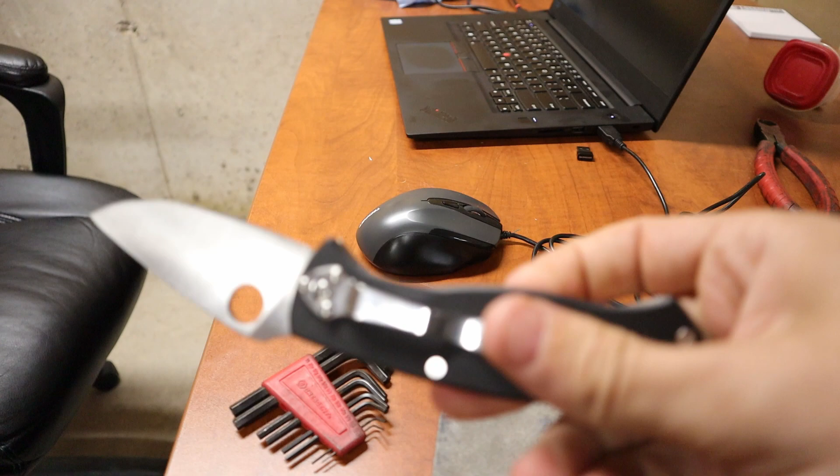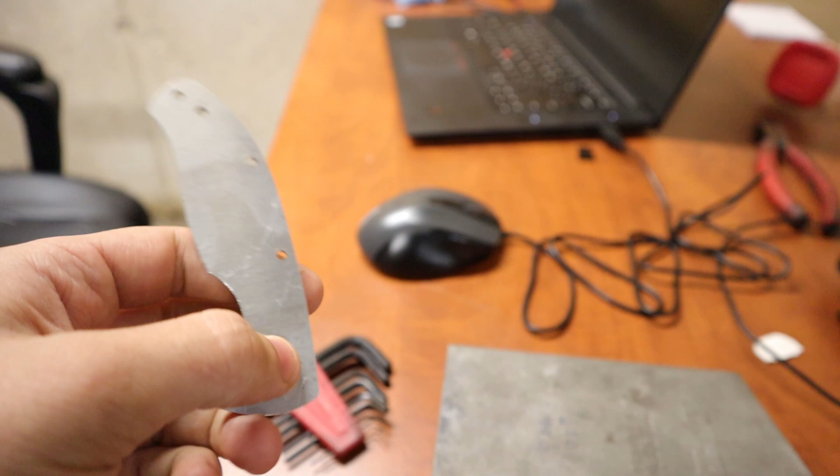We're going to talk about handles for this Spyderco Tenacious that I got. So this was the handle that we worked on last time, and this pin, the rotating pin or whatever, slider pin, was too big, and so this is the one that's currently on here with the company logo. So this is basically version 4 that I have, and there's a couple things I had to change.

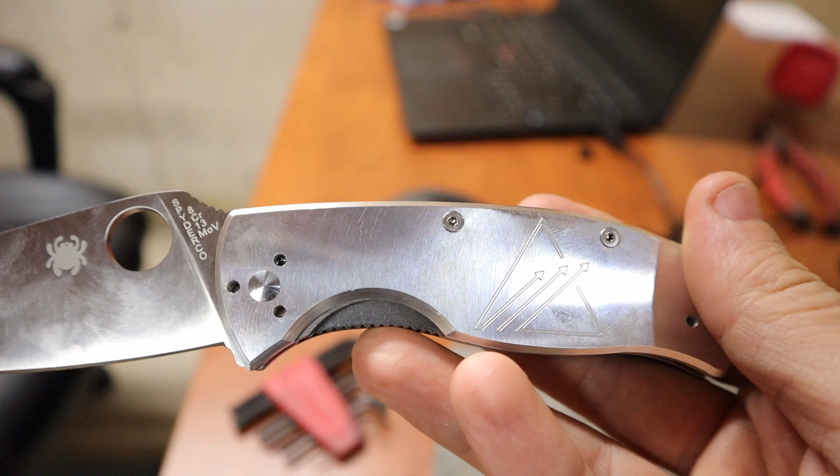I don't know if the camera's going to be able to pick it up, but you can see the top middle body is, yeah, you can see it there, is bigger than where the handle comes out, so I adjusted that. And then other than that, it's pretty good. For some reason the stock was incorrect when it machined it, so it actually machined on the edge of the stock. And in Fusion, the body was centered, the model was centered, so it's kind of weird that it did that.

But other than that, it's good, working. There's enough slop in the pin. Well, I wouldn't call it slop. There's just enough to have the action really nice and smooth, like on the knife. So yeah, I like it.

So we're gonna do a bottom one, possibly today. I'm not too sure. I'm on the fence about if I should remake this and this one today, or if I should actually do some organizing in here. But this is kind of not a guide style video, but more of a vlog style, so I guess we could choose whatever we want to do.

But some updates as far as actual machining things go. I got more pull studs in from Maritool because I only had 15 before, so these are through coolant pull studs. And I think if you're going to buy pull studs, you might as well just buy through coolant, unless you never ever plan on needing through coolant, because the through coolant ones are only a little bit more expensive. Yeah, so there's that.

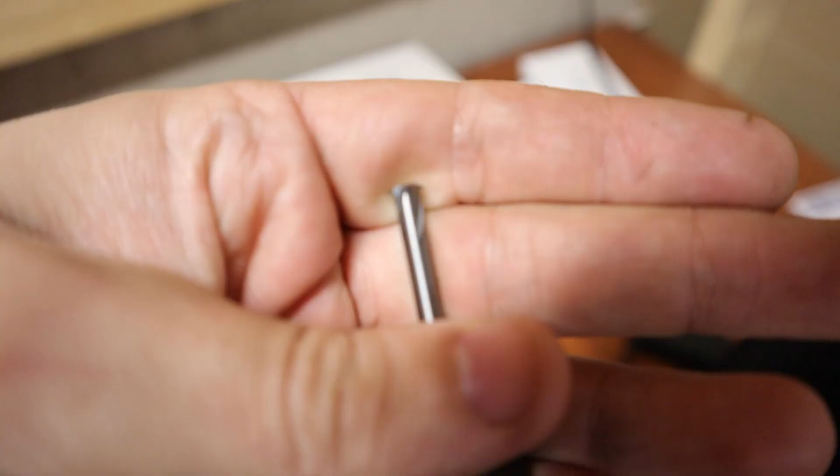There's some tools that I got from Lakeshore that need to be organized. Like here's a thread mill, which I have absolutely no idea how to use, but there are guides on the internet, so we'll be okay. Check it out. Yeah, single point or whatever you call it, four edge. I don't know how you actually define this. Yeah, they call it a 4-flute. So 4-flute. There's that, and then there's a couple of really nice cutters I got.

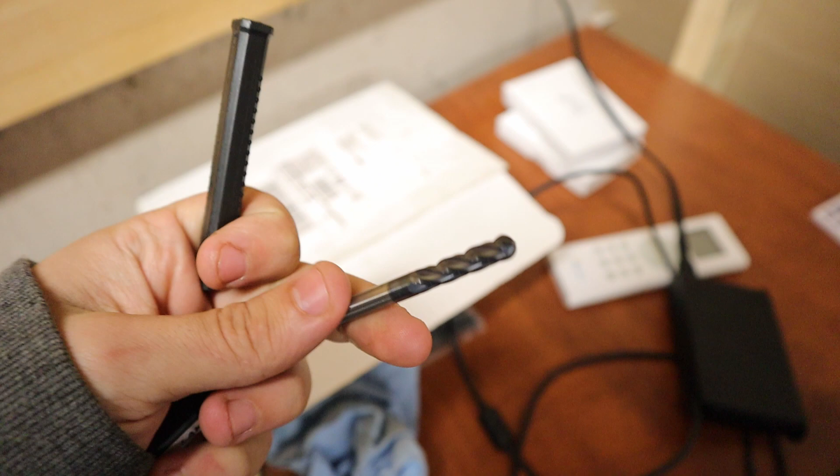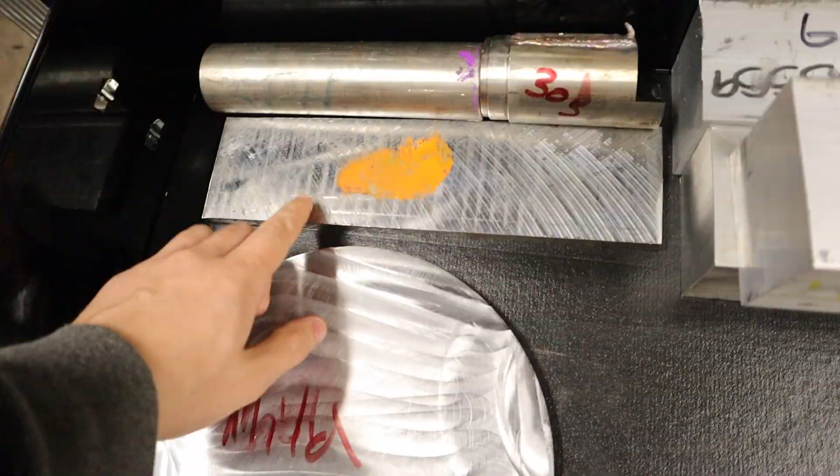Really nice tools. I thought I wasn't going to have much use for them, but I'm working on one of those mini pry bars. And that's going to be made out of tool steel, which I have. I'm not entirely sure what kind of tool steel, but she's tool steel. So we're going to do a pry bar out of that. I'll show a video later. We'll do a video. It's only like that big.

It's about the entire length. Actually, it's probably a little more. It's probably this body plus half. So probably to here, where my thumb is. Not that big, and much more narrow too. But yeah, I want to build a pry bar where the end of it's like a pry, and then the side part has an actual blade on it, so it's like a dual purpose type thing.

And if anyone is curious, this is kind of how I organize the end mills. So I just have them listed, like this says 1/8 4-flute, square end, high speed steel, and then if it's got a coating, it'll be on the end, and then the actual material, solid carbide, square end kind of thing. So obviously it's still a work in progress because some of them are not filled, and I don't have all the labels for what I got from here.

Let's see. Let's go ahead and set up. We'll set up one piece of stock to do 2 of these. And hold on, we'll do the startup on here.

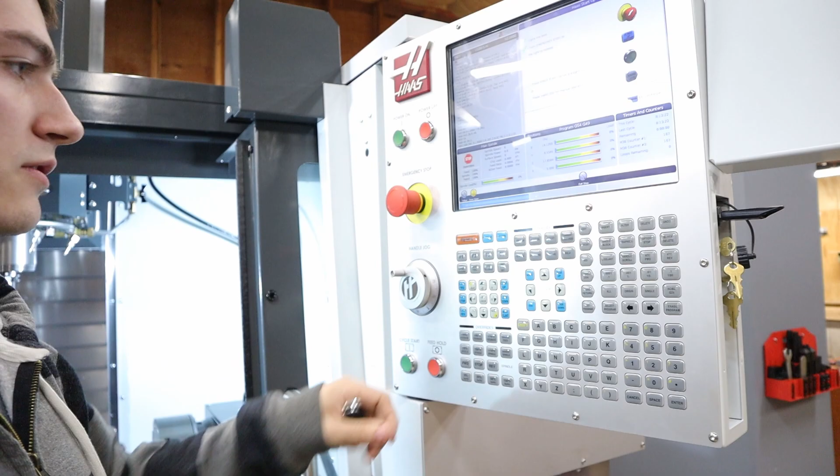I already warmed it up today, but I haven't been in the garage for a couple hours, so I usually just shut it off. That way, save some power.

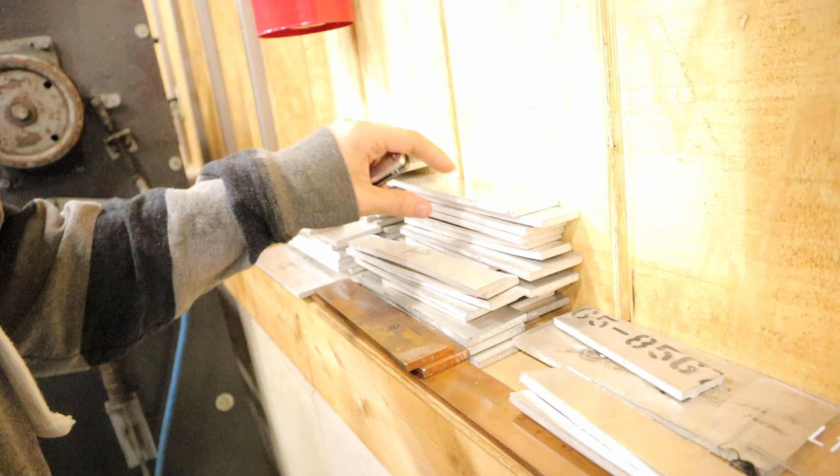So let's get some stock for 2 handles, which is, we got a ton over here. So all I'm gonna need is one that's long enough to do both. That might work pretty good. Should be able to fit 2 there. Yeah, I'm just trying to figure out, I guess. Yeah, maybe we'll use this piece because otherwise I'm not gonna have any use for it. Let's load it up in the machine like that.

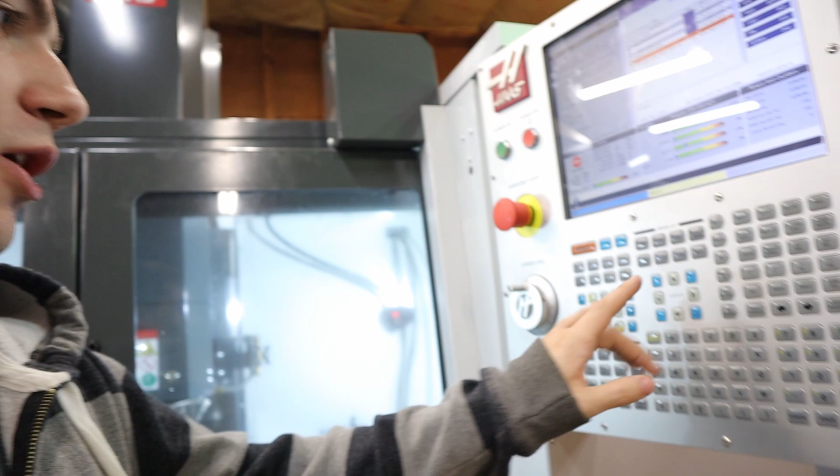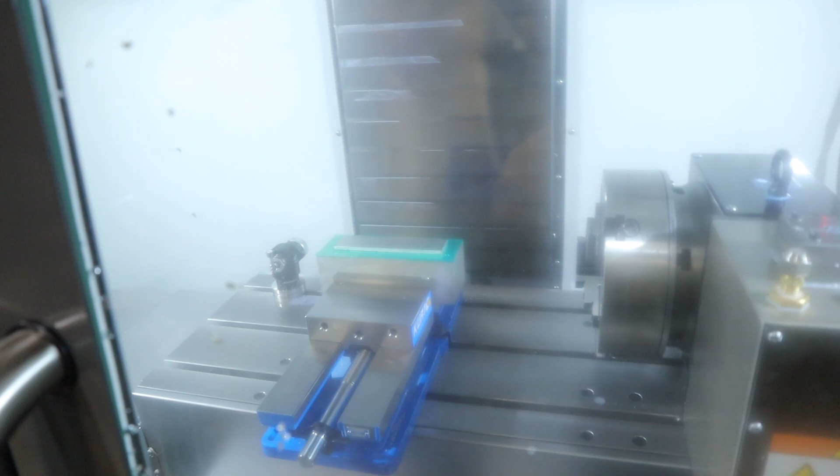Did the offsets, did the center offset and the up and down, the Z. And we're gonna hit go. Oh, make sure, if you're like me and you can't afford high-speed machining, make sure it's turned on. And then I'm just gonna let it go and see if it doesn't shut off during the actual program because of voltage drop issues. Well, good times. Yeah, that's what happens when you don't have enough power in your garage.

Yeah. All right, things are going semi-smoothly. Currently doing the bores for the slider pins and the whatchamacallit, the screws, the shoulder screws. And I changed the step down. So this is a 16th inch tool, so it's pretty tiny. So I changed the step down to, well, I don't know what it was, but just so it has some step down as opposed to basically helixing down at the bottom of the hole and then taking a huge full depth cut. Well, huge in the 16th realm.

So it sounds much better because instead of doing helix all the way down, doing a full cut, it only does like a quarter of that. So before it was squealing, and now it sounds like a much more normal cutting sound, if you will. I don't really know how else to describe it. So this next is the exciting part where it does the 2D adaptive and actually hogs out most of the material. Yeah, so going good.

And then after we do this blade, we'll do the bottom blade, and then we'll see about maybe making some fixtures to actually do these production style, and updating some designs for the engraving part, make it kind of cool. And then maybe try different materials like TI or copper or bronze or something pretty cool. So yeah, I'll update you in a second.

All right, I'm back. I just went and ate some Chinese food mid-production. I'm such a terrible person.

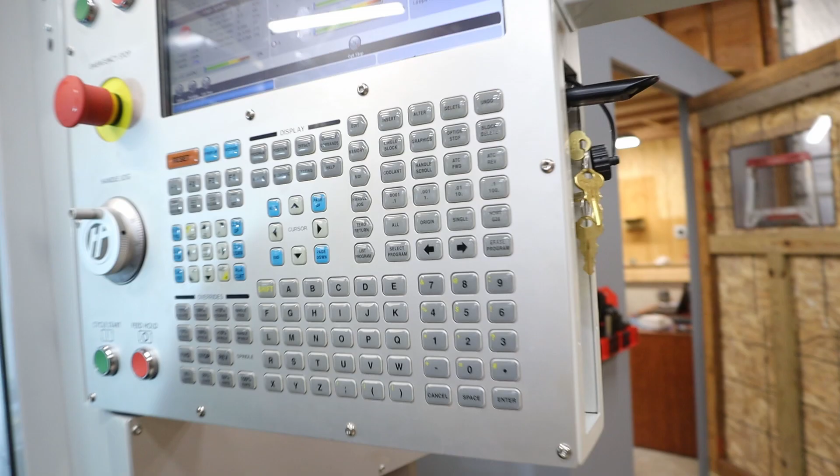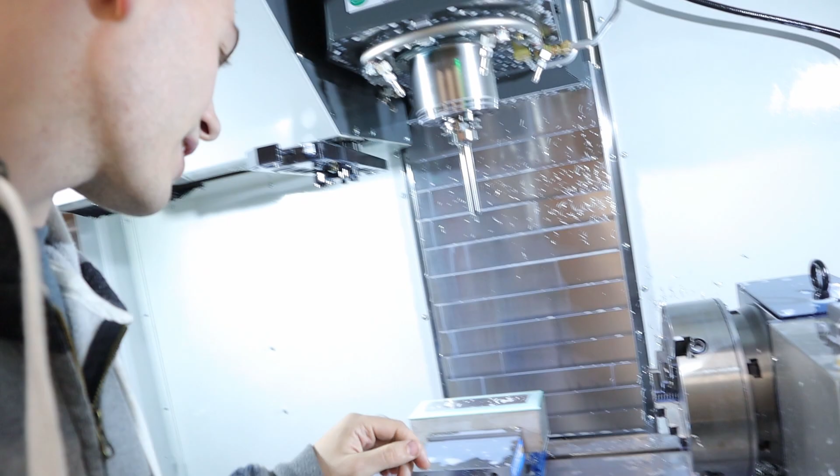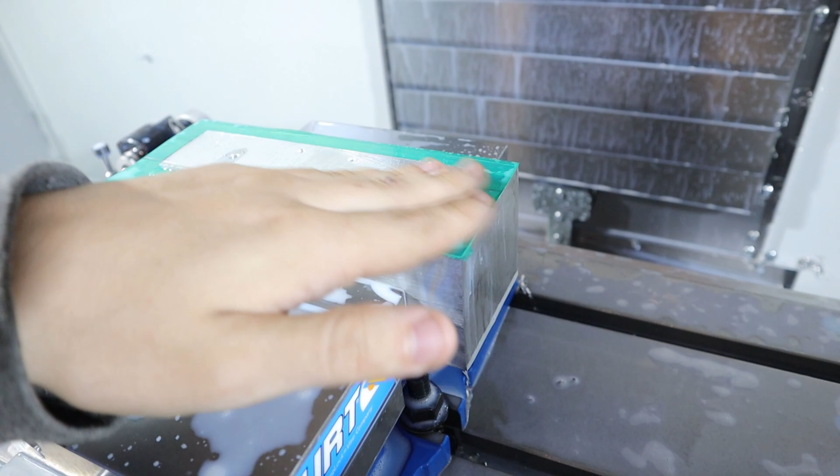Pro tip, if you didn't know, there's this button that says option stop right here on the Haas machine that'll actually option stop the program between, I don't know what M code or what actual call it makes to determine the option stop. But the nice thing is when the machine stops in between the tool paths, you're allowed to open the doors and stuff, at least on this VF2. So we're in between ops. The next one is to hog out the actual profile of the blade, and we're just going to take a look at the finish we got right now, which is pretty good.

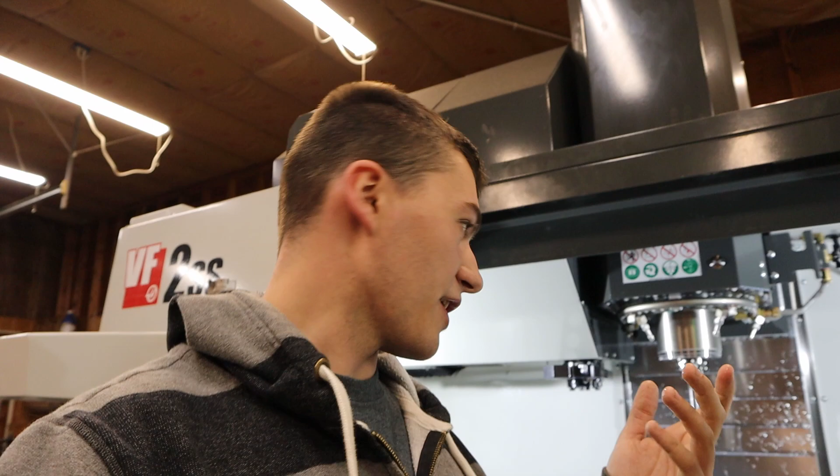There's still some shell mill tool marks, and I think the inserts that are in there are general purpose. Excuse me, ate too fast. The inserts that are in there are general purpose, so that means that they are purpose to cut everything. There's a feeds and speed listing for every single material. So they're not finishing inserts. If they were finishing inserts, maybe you'd have a better finish than what's shown.

And I'm also still working on the feeds and speeds. So I did a finishing pass on this one of like 15 inches per minute, or maybe it was 15 feet per minute. I don't remember. Inches per minute, I think, and 5,000 RPM. So with a step down of 30 thou maybe. So you can kind of see the finish. Actually, the faster feed before, 30, I think 35 inches per minute, actually left a better finish. So that's something interesting. Might have something to do with the peeling action of actually cutting.

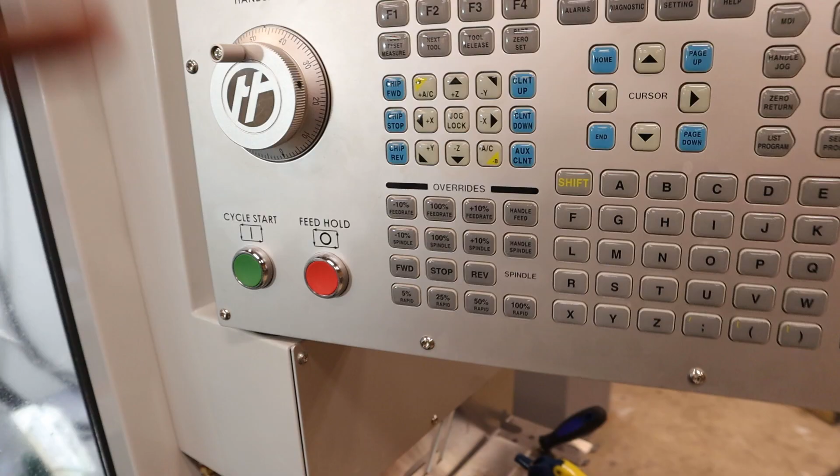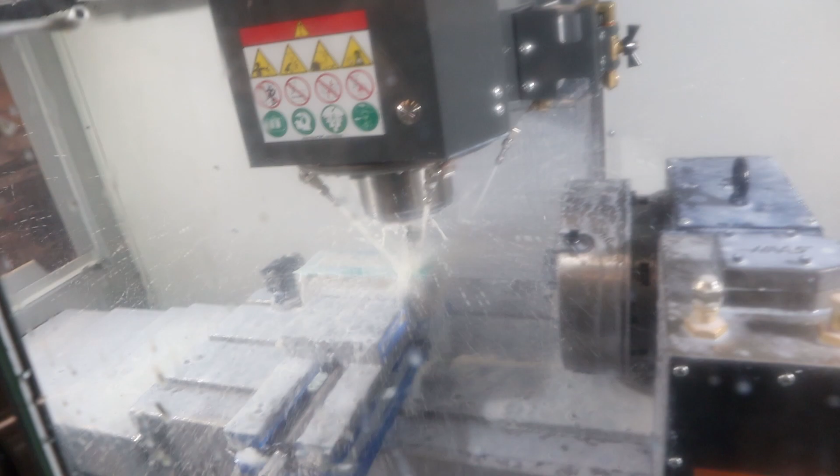And I think it sounds pretty good. I bet you could go a lot harder, but one, we're glued down. These blocks aren't necessarily flat on the bottom, so I don't want to have them fly off and hit the tool setter or anything, because that would be expensive and make me a sad boy.

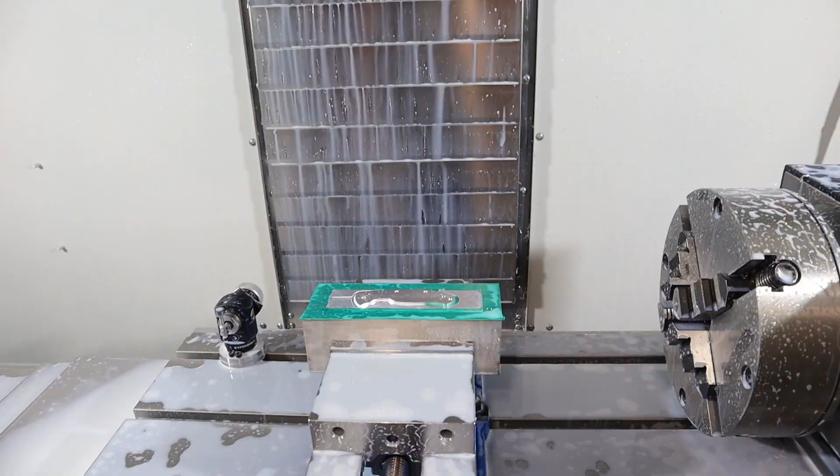Alright, we got the handle profiled out. I think this looks so cool, how nice that side finish on there is. Let's see. So it's just a normal 2D adaptive, and then a 2D contour to clean up the edge. So that looks pretty good.

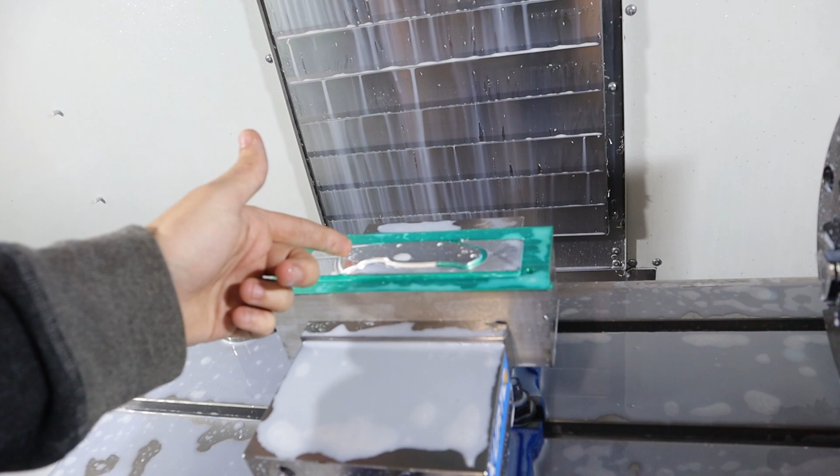Next is a 3/16 ball end, and that's going to do a scallop tool path, and that'll do the edges. It'll cut the edges over, roll them over, make them nice and clean. And then after that, we're going to engrave right down in this corner here. I don't know if you guys can see that. Coolant dripping all over me. Right here in this corner, we're going to engrave the company logo.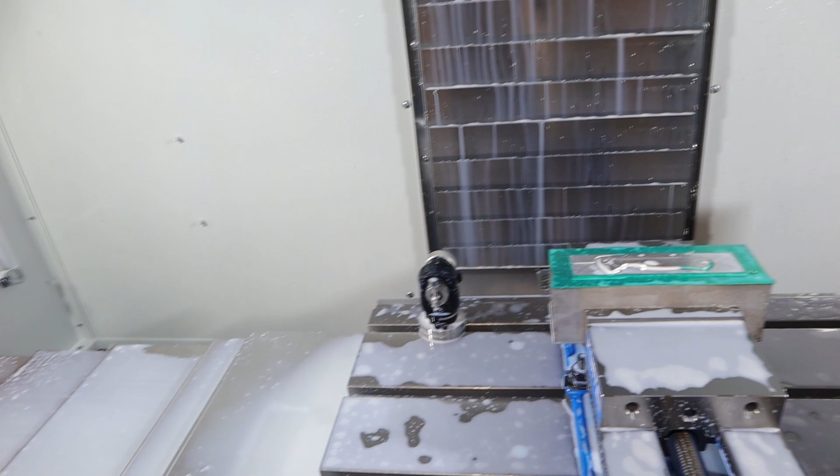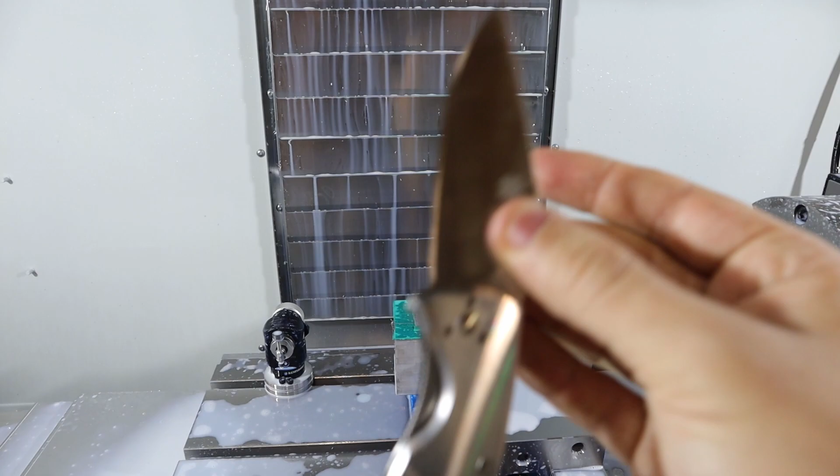If you see the handle, I know I showed it at the beginning of the video, but this one that's on there, that's what the logo looks like. So it's super simple, but there is a space between each arrow, so it might be kind of difficult for the tool to get in there, because the tool that I'm using is a Lakeshore Carbide 20 thou ball engraver.

But you'll see it in a second after we do this surfacing. So yeah, I don't know if it'll work in there. The tool path shows it will, so we'll just have to find out. It'd be cool to have a small discreet logo. I think that always looks cool. I'm not too much of a fan of doing the big logo like that.

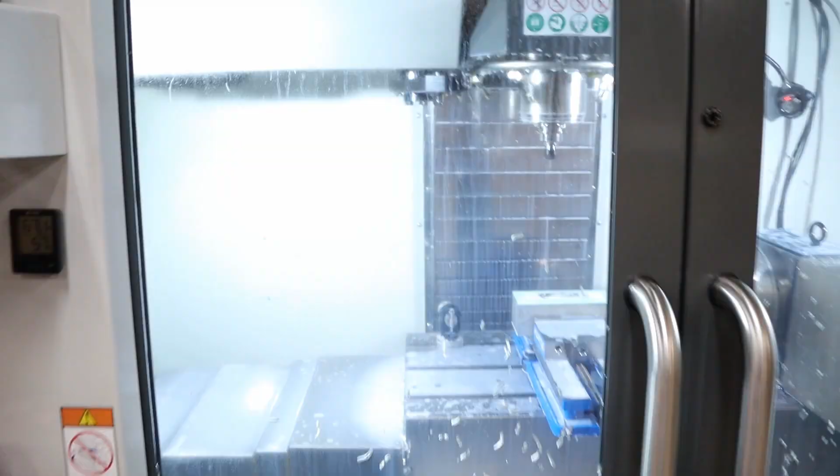Cool. Now we're gonna do 100% spindle. Apparently we're not. Alright, give me a second, we'll restart this thing. Oh boy, it's still spinning. Yeah, it doesn't actually brake when it shuts down like that. You gotta wonder how bad that is, to have the spindle still spinning while the machine's off. Like if it backfeeds somehow. I don't think it would.

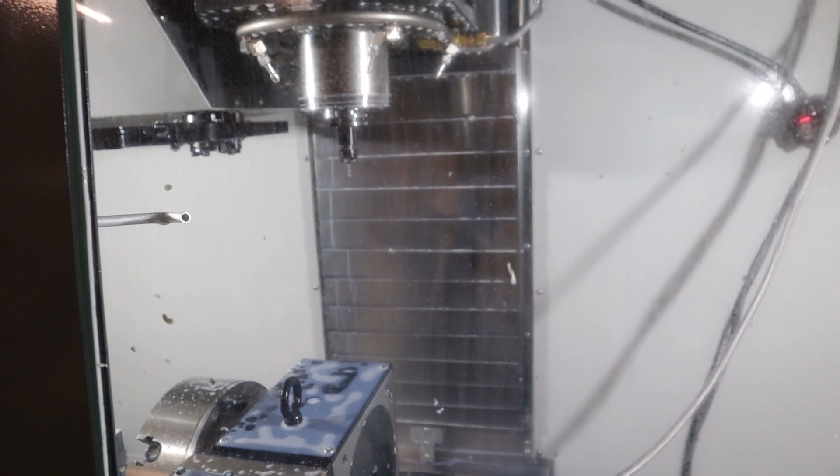I can't imagine a low voltage issue is that awful for the machine as opposed to a high voltage issue. So yeah, the worst part is you could use the spindle brake if it did a tool change, but you can't do a tool change until you go through the startup steps, and you can't cycle the door because if the spindle's turning, the doors are locked. So just wait for that to spin down. That just means my bearings are really good, what can I say? You know what I'm going to do? I'm going to re-aim those jets because none of them are hitting.

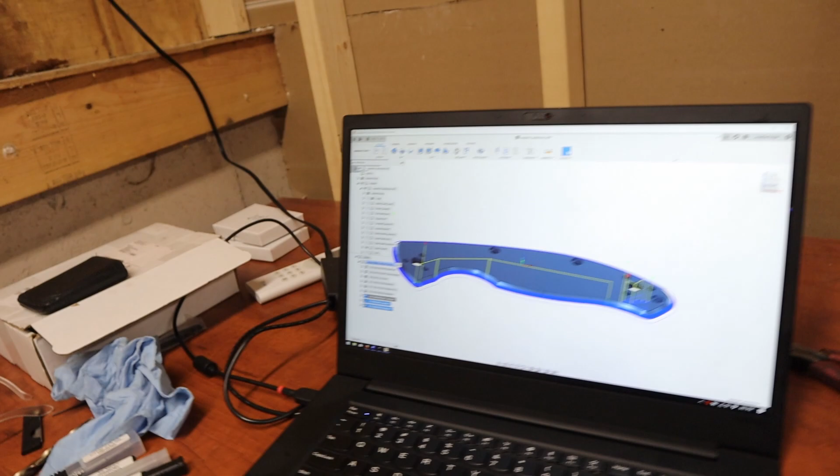Huh. You know what I must have done is posted out just the contour by accident. Let's see what I actually did. Oh yeah, see? Okay. Alright, give me a second. Pretty funny because I had that heart racing moment when I was like, why is the tool going off to the side? I could have sworn the ball end mill goes down center. But obviously I couldn't see that it wasn't a ball end mill. Yep, that's a ball end mill. All 12K.

I would say this is probably a good speed for this setup, from what I can tell, finish-wise and productivity-wise, if you will. Oh, that glass is way dirtier. I love the air blast on here. It doesn't do anything. I guess it depends on your coolant, but this coolant seems to run down pretty good. The coolant we use at work sticks to the glass really bad, and with this, if you wait a while, the glass becomes pretty clean. Like I was saying in the other video, I need to get a GoPro and stick you guys in there. It's always a good time.

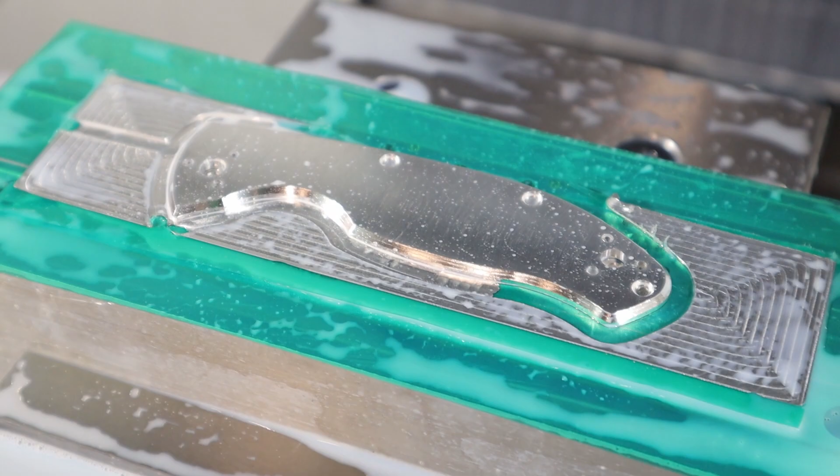Alright, sweet. So we got the profiling done. It smells like food in here. I hear this is terrible for your lungs. Oh man. That is clean. Look at that. That's awesome. Looks better in person, I swear.

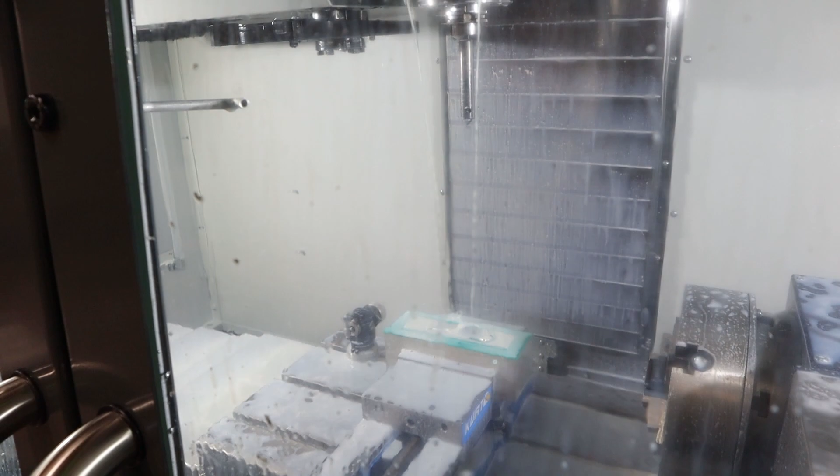Alright, next is the engraving, and like I said, we're going to do an engraving right on this back corner here. And I'm excited to see how it turns out. And hope it crashes through. Excellent. Wow. I think it was too tiny to even run the toolpath, because I don't think it cut anything. Oh, look, it added some nice dots. I don't even know if you're going to be able to see them on camera.

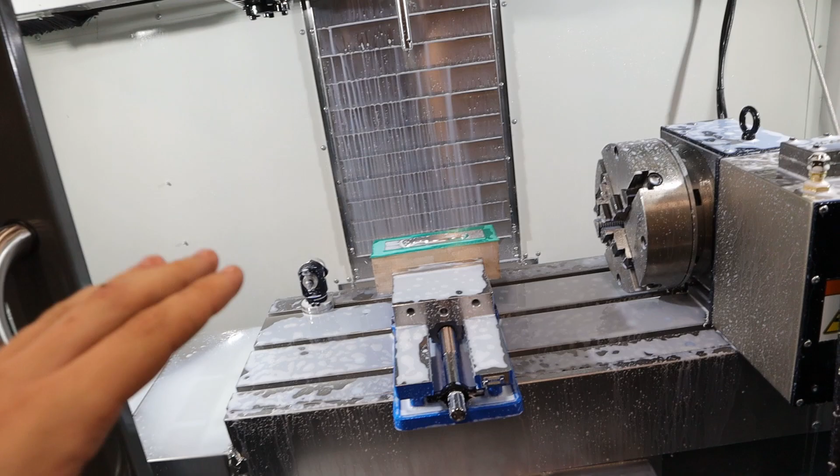Unhelpful, truly. Oh well, I'll just pull that handle off, and then I don't necessarily need to have it engraved anyways. The company logo is not that exciting. Alright, I'm going to pull this off, and then we'll get started for the bottom side handle.

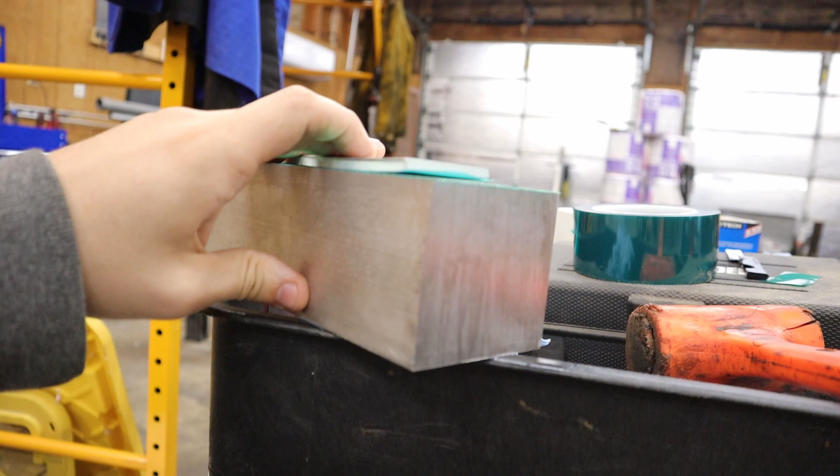If you guys are curious how I'm setting these quick prototype jobs up, I got masking tape, well, actually it's powder coating tape, and then powder coating tape, and then this 2P10 super glue. You put the super glue on this guy and place it down on here. Make sure you're mostly straight. I tend to not worry about it being straight. I mean, mostly straight, but man, this one's kind of bowed slightly.

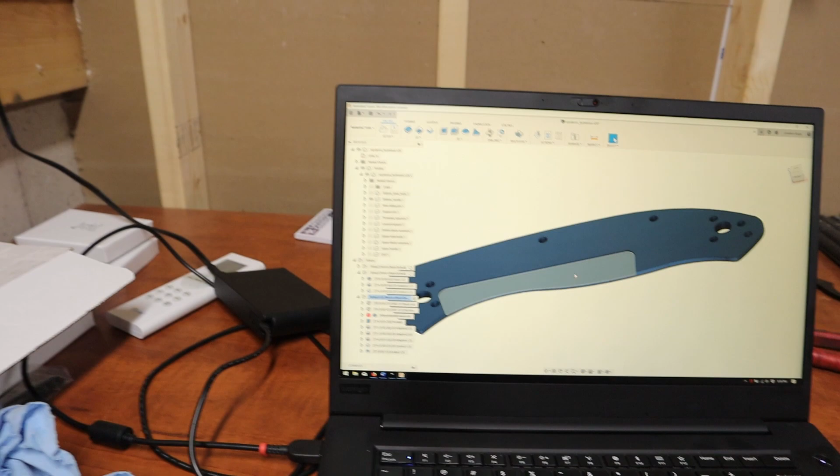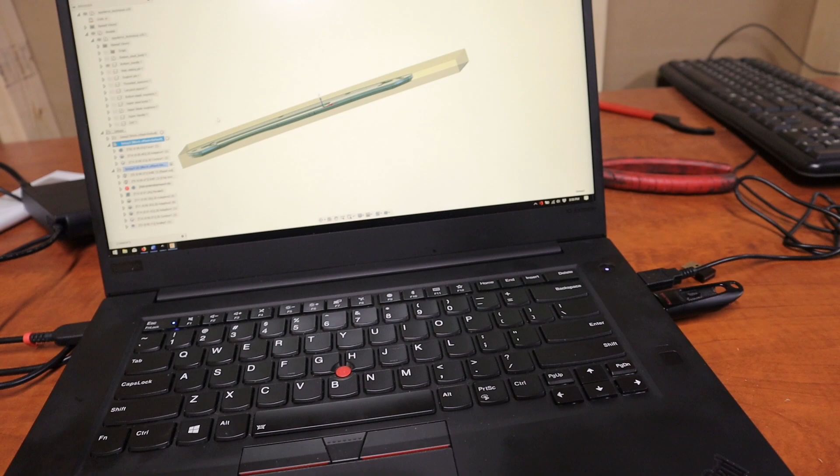That'd be okay. Alright, ladies and gents, I've been working on the CAM for this, and I think we got it covered. So the bottom handle has a relief right here for the thing, you know, the thingamabobber, right? First we're gonna face, start with our stock, center, face, do a 2D adaptive to clean that out, then a contour to come clean up the edge.

Alright, we got her all probed in, and hopefully it doesn't fly off the block, because she's got quite the bit of a bow to her. So we'll see. Well, that is not what I wanted there, Haas. We're gonna do position on this, just because I cannot see. Oh yes, it's not even touching it. Alright, I think I figured it out.

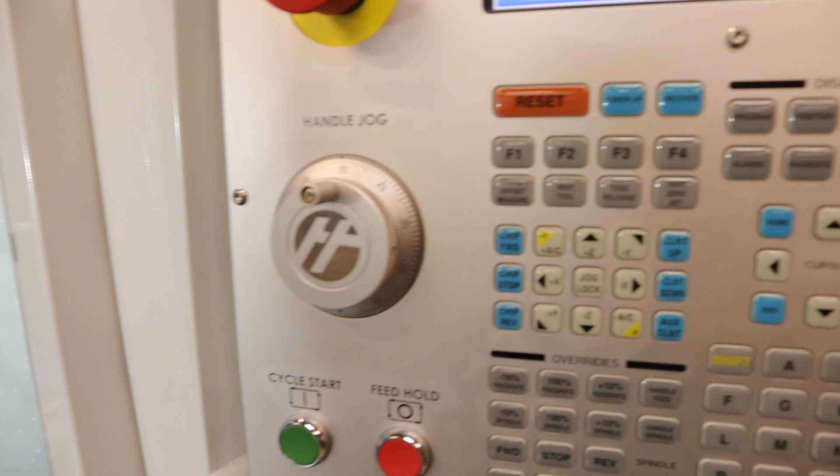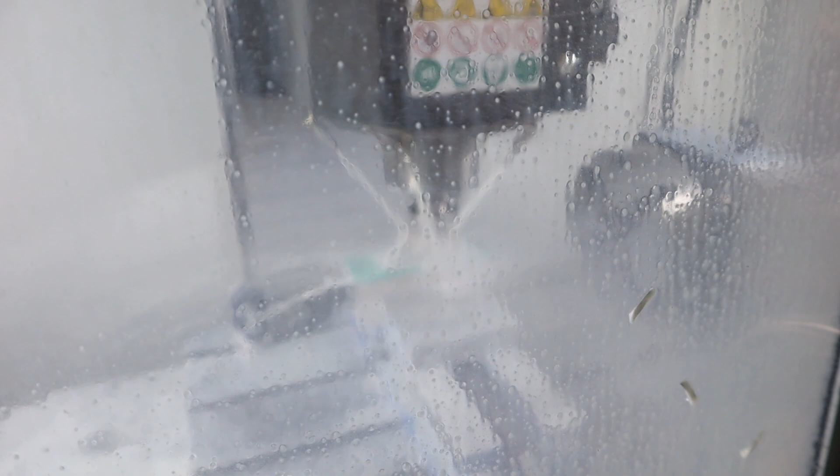I had the stock point, or the box point, in Fusion set to the top of the model as opposed to the top of the stock, so I'm almost certain that's what it was. I'm gonna hope that's what it was. Good luck! Oh yeah, let's mill with the probe.

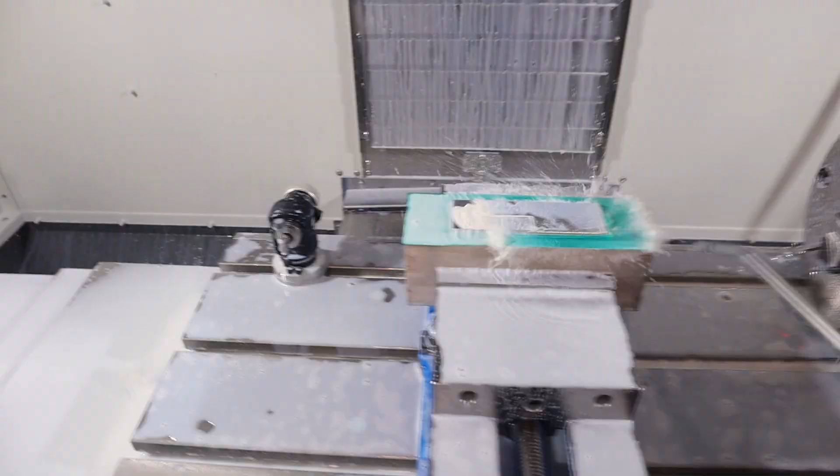Either that's the world's smallest relief, or the tool's not hitting the right thing. Oh, what a relief! I must have gotten the heights wrong on the adaptive. Alright, let me fix that.

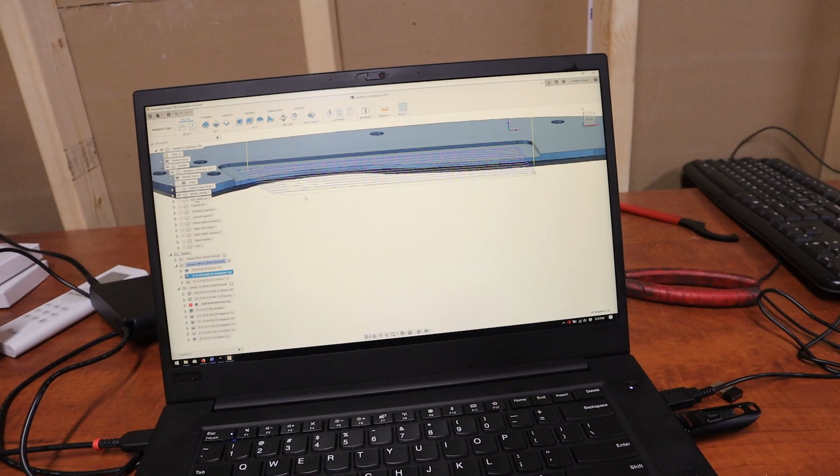Alright, it actually did that because I had axial stock to leave on the adaptive, and axial is like height-wise when you leave stock, and radial is like on the sides. And so this pocket's only 20 thou deep, and the adaptive was going to leave 20 thou axial, so that's why it didn't even cut on the floor, and that's why the contour cut, because the contour is going in at tolerance and cutting.

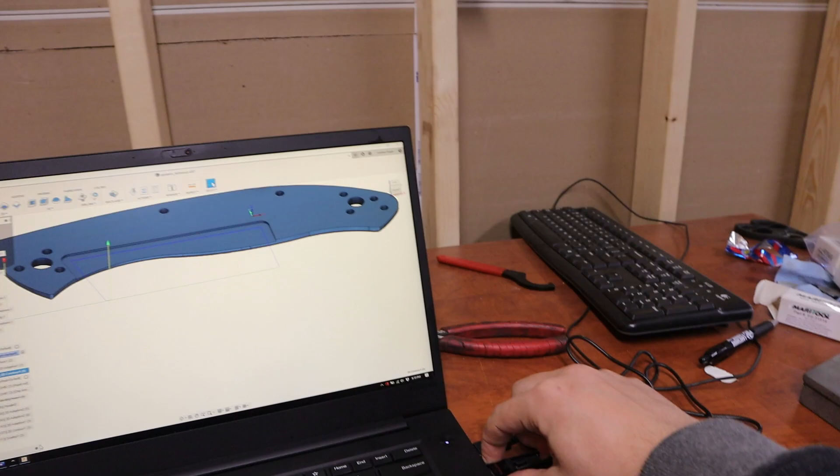So let's re-post process this. Actually, I just did that. And let's try it again. Machining is fun. There we go. Now here's the contour, which we already did, so it probably won't make a noise. Cool. So here's the bottom side. That's what that relief looks like.

Pretty cool. Alright, now what I have to do is unglue it, flip it over, luckily it's nice and flat now. And then we'll do the second op. I'm almost certain this is not the best way to do this, but when you don't know what you're doing, you don't know what you're doing, you know? So we can't put glue here because there's obviously a void of 20 thou. So let's just hope this holds. People in the comments laughing at me.

Cool, okay, so I measured the height now, which is 1.545 at its tallest. I updated in Fusion, so we're gonna go ahead and get this started. I'm gonna go ahead and get the probe. We'll measure the Z again because now the height's different, and do the offsets in the rectangular form because we don't have a vise stop or anything. So yeah.

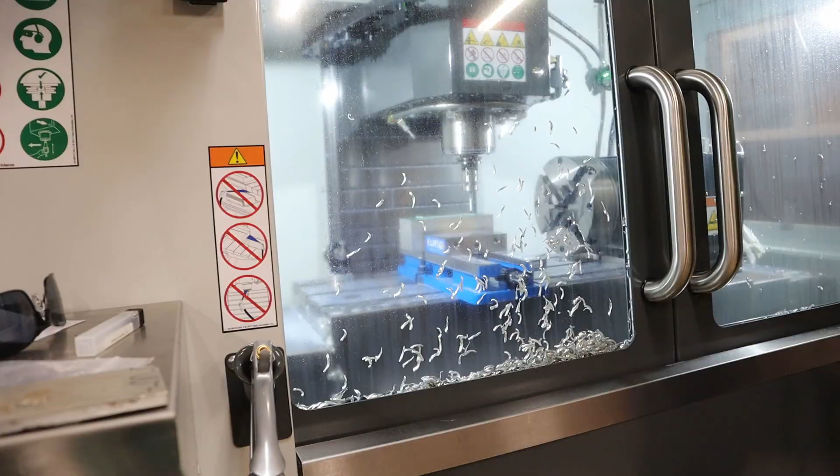Man, look how much you guys can see. I don't think the flood coolant is actually hitting the drill tip. Just like a cone around it. Alright, here comes the cool one. I'd like that tool path to start on the outside because I didn't like that dive into the top of the material, but it's all okay. It might be because there's that bow in the piece of material there. Hopefully this tool path looks pretty cool. Oh, that's kind of cool.

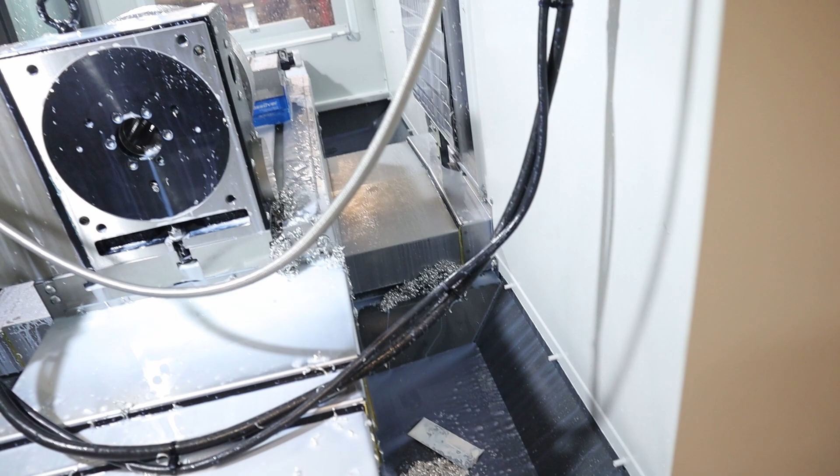Sweet. Didn't break, that's good. Now we're going to do the 2D adaptive for the outside. And I won't bore you guys with this one. Do you see a problem with this picture? Where's my part? Huh. Alright, well, I'm gonna have to come up with something other than gluing it, I guess, because, yeah, that ain't gonna work.

Alright, boys, well, I'm gonna leave this video at this somber moment, just because it's probably going to be like a 25-minute long video at this point. So we're going to figure out some fixturing probably, because we got lucky that the part didn't hit the tool setter.